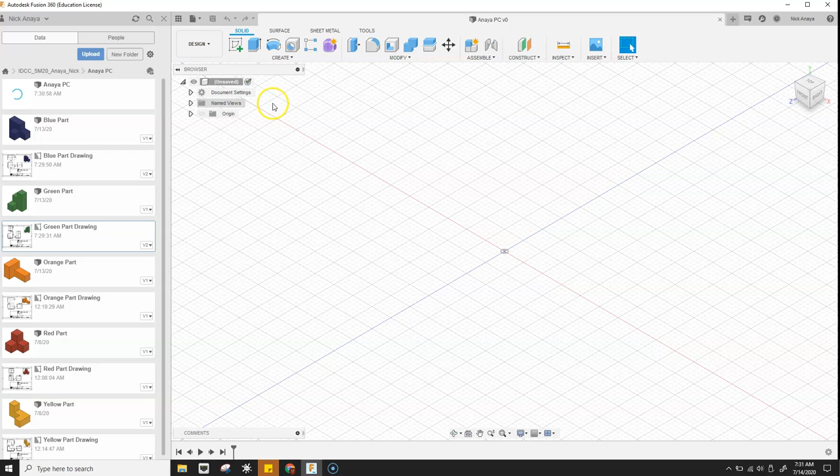So in order to do that, we have to first title this untitled document, give it a name so that it's saved. So I'm going to click save, and then I'm going to go ahead and call this Anaya PC. So that's going to create the file that is going to end up being the assembly of everything.

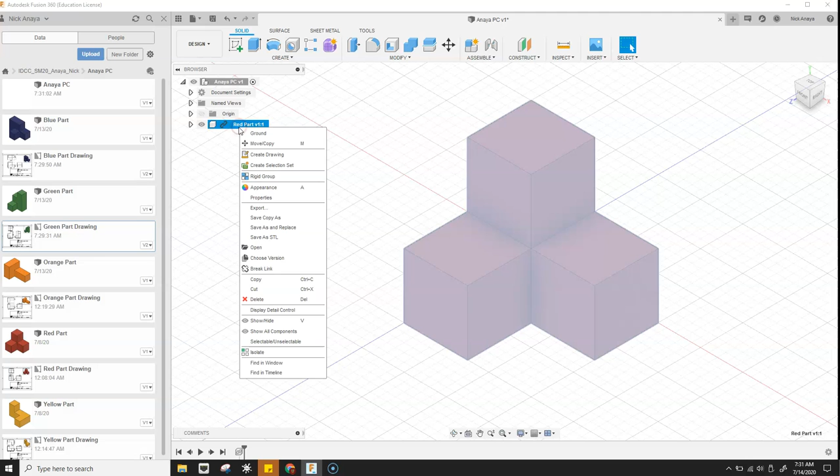So I'm going to first take the red part and pull that in. And that's going to automatically put it here. Now, first off, we'll just click OK, and that way it's at the origin, but it can be moved. We don't want to move it. We want to leave it at the origin initially. So I'm going to go ahead and hit revert so it goes back. Then if I right click on the item in the browser, I can select ground, and now this is locked in place.

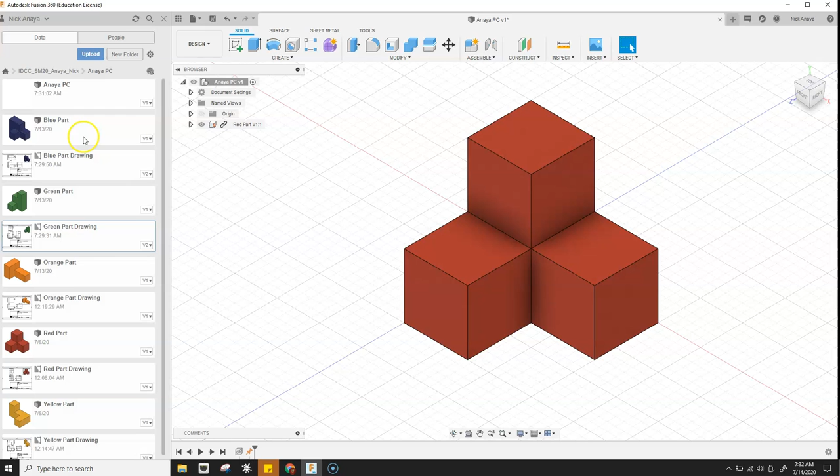So in Fusion, everything is connected with a joint. It's a little different than some other CAD programs where you might be used to constraints and you constrain different faces and you add 3 constraints per connection. In this case with Fusion, most of them can be done with one instance of the joint. So in this case, let's go ahead and let's grab the blue part, pull that in.

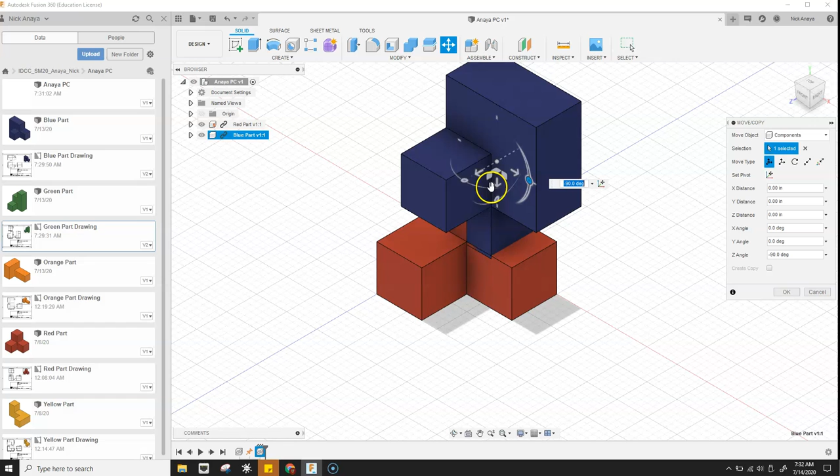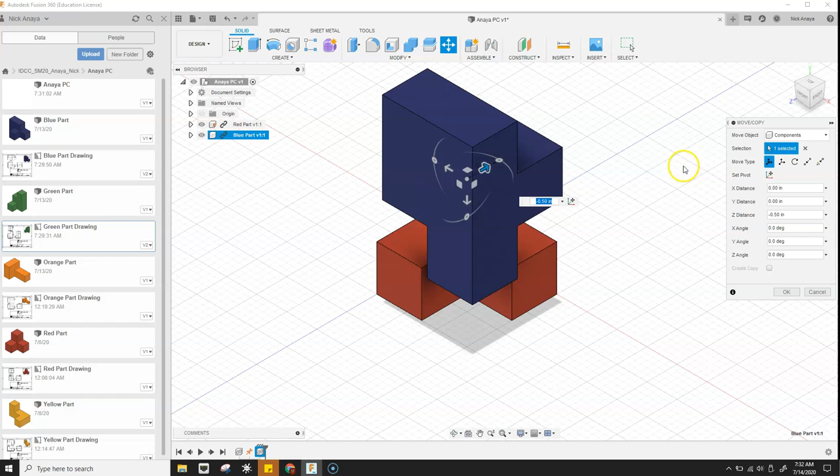You'll notice it goes to the same origin area, but then I'm going to go ahead and use the arrows to drag it and manipulate it so that it is in the orientation that I want for actually interfacing with the red block. And each time, as I spin it, I'll look at the degrees, that can help me kind of figure out where to put it. And then now it's facing the right way for how I want to connect it to the block. And then I'll click OK.

So now for the joint, I'm going to go ahead and click assemble and then choose joint. The other option is to pick J. And in this case, we're going to join using a rigid joint. So if we look under motion right here, this is rigid, it's selected. There are a bunch of other types of joints, but for the puzzle cube, it's not moving at all, so we're going to use the rigid joint for everything.

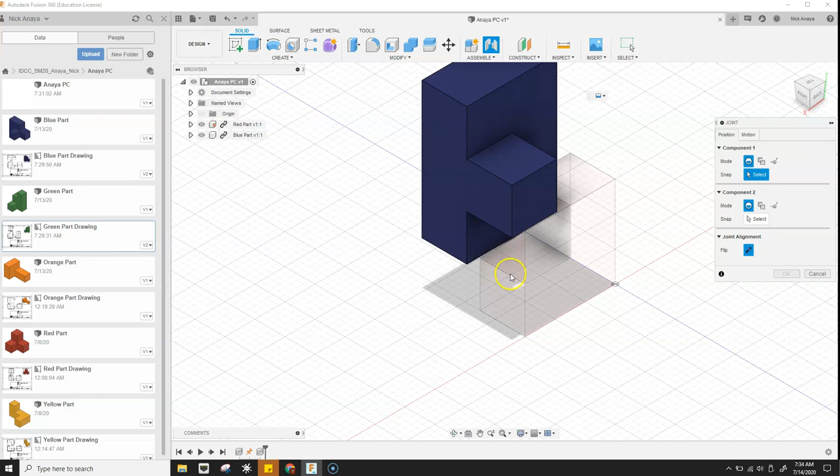So the first thing we're going to want to do is make a joint between the blue block and the red block. So I'm going to want the bottom of this to interface with the top of the red block. So the very first thing I'm going to do is click on select so that I can begin selecting a joint position to match up with the red block. So in this case, I'm going to spin underneath and grab the center of this portion of the block. So it gets that little circle. I'm going to click on that.

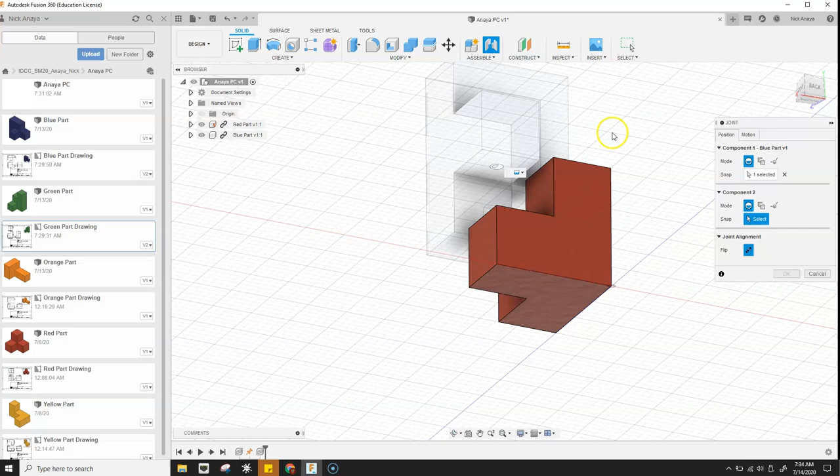Then it's going to let me pick my second object. In this case, I want it to be the center of the top of the red block. And I will click there. It's going to put the two together. And then I'm going to click OK. Now, if I try to move the blue block, it will no longer move. And then I can also see that there's a rigid joint icon right there.

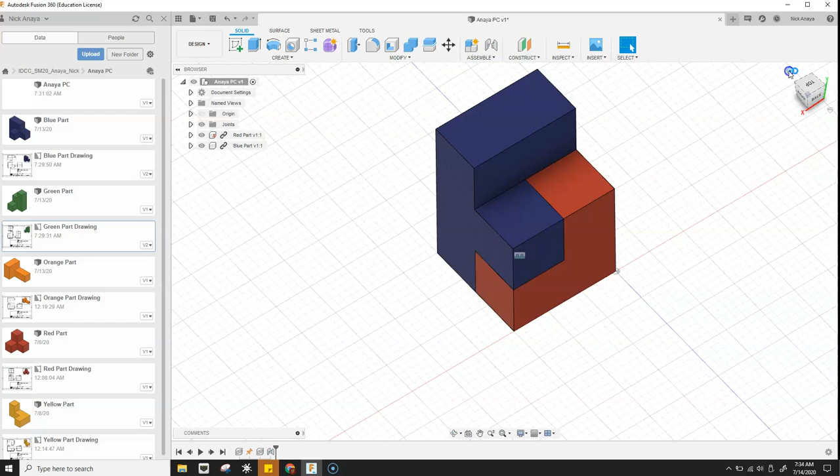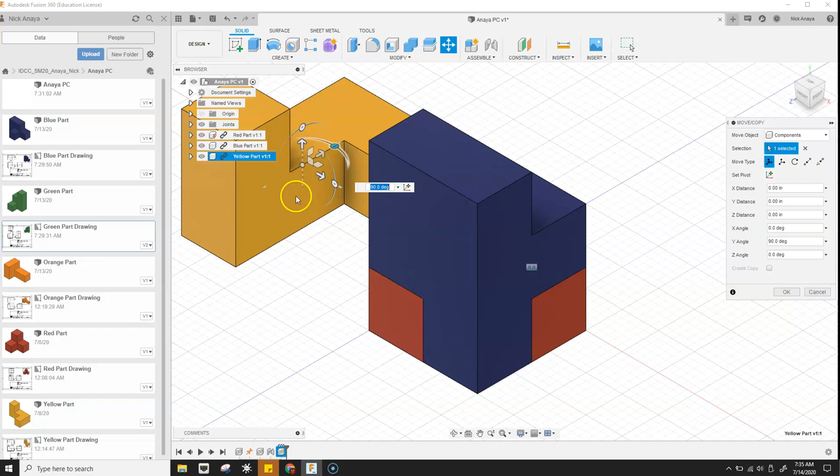So if I go back to my home position, the next block I'm going to do is going to be the yellow block. I'll pull that in. The yellow block needs to go back and to the left. So I'm going to first push that backwards. Then I'm going to spin it perpendicular, and then, just to make it align a little better, move that over, and I'll actually bring it in a little closer to where I'm going to place it. And then click OK.

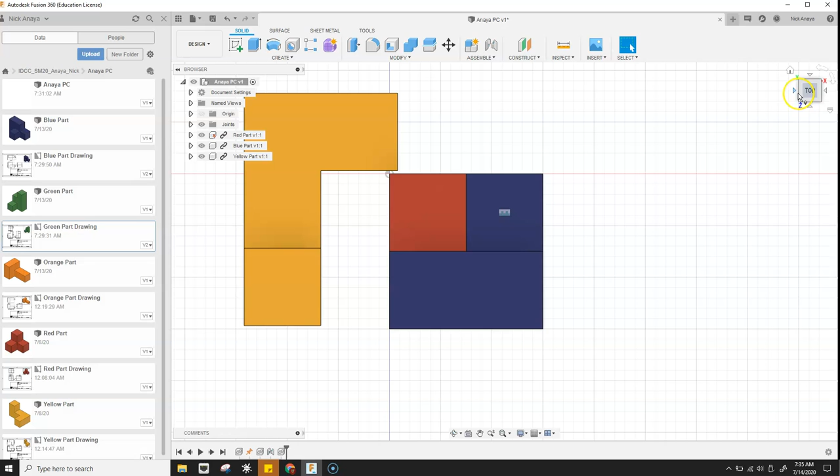So now, if I go to the home position again, I have this yellow piece that I want to have mate with the red piece or the blue piece, depending on where it's going to touch. So in this case, probably the simplest way is to match up the corners on the underside. So if I look down here, I'm going to want this corner right here to match with this corner here. And so that's what I'll go ahead and use for my joint.

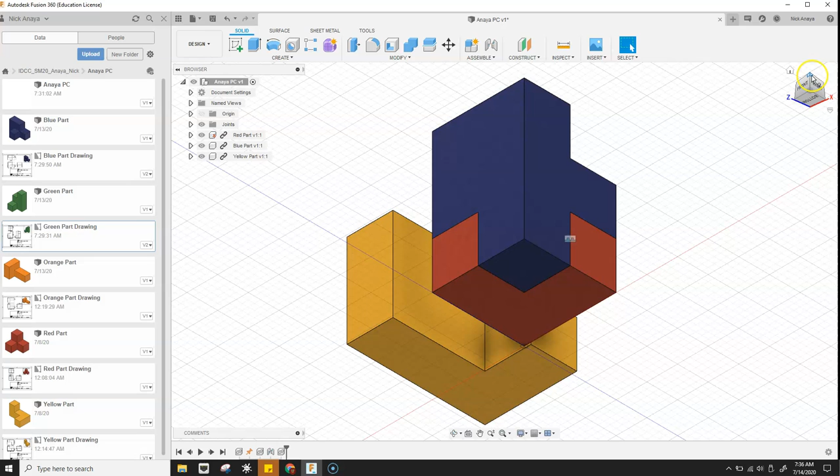It's also possible to use the various faces. It just really depends on where you can get a proper joint that will match, or I guess we could also use this bottom left-hand corner. Actually, let's go ahead and do that because we can see it better. So I'll flip around to here. We're going to go ahead and hit J this time for our quick command. And as you can see, as I move towards the corner, if I start on this face, it will jump to the corner and have the joint point in the lower left-hand corner facing towards the puzzle cube.

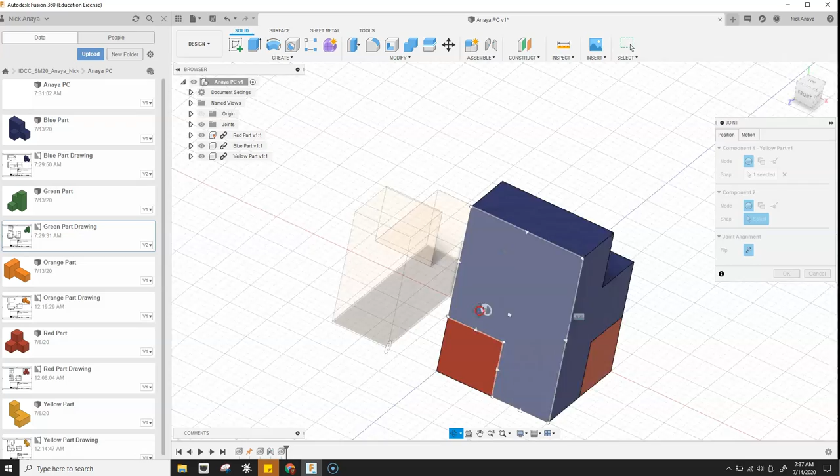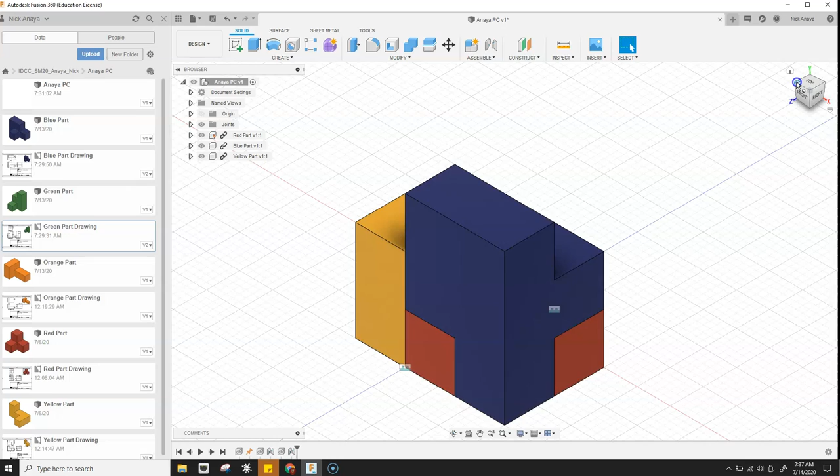So I'm going to click on that. Then I'm going to orbit around. In this case, I hold Shift and push on the trackball. Go to the red one, go to the corner, and click. And that's going to join those. Click OK. Home position. If I try to grab this and move it, it doesn't move, so we're locked. There we go. We've got that connected, and we're going to go ahead and get our green piece now.

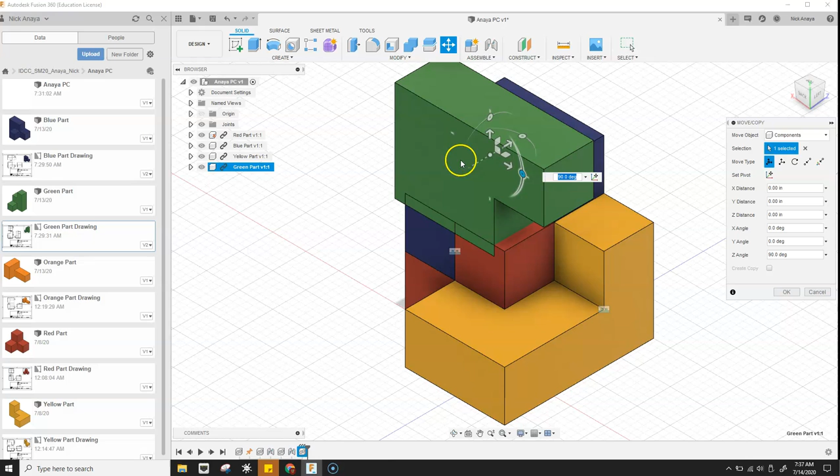The green piece comes in. It always comes into the origin or wherever it was built in its own drawing, but then we can move it around to figure out where to put it. So I'm going to orient it so that it matches the orientation that I want with the puzzle cube. And then move it to a position similar to where it will mate with the yellow piece. So I'll go ahead and click OK.

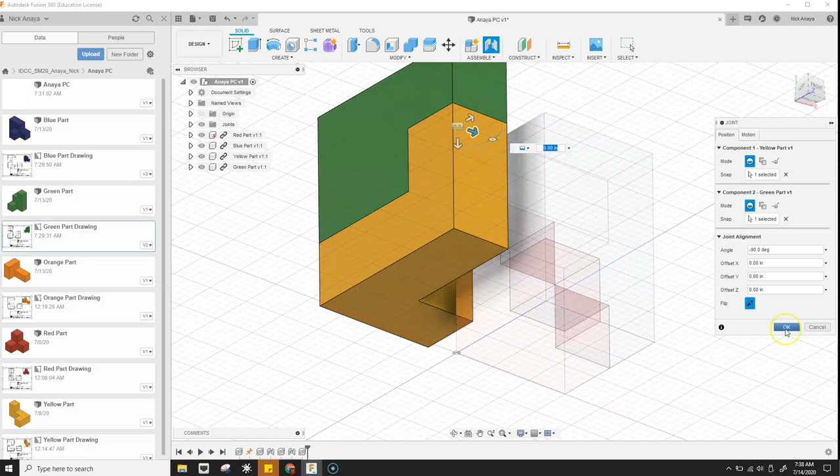Now hit J for joint. And now I'll spin around. I'm going to go ahead and join the top of this yellow piece to the bottom of the green. And it's interesting because the yellow piece flies up, but then when we say OK, it actually pulls the green piece down. So because the yellow piece was already locked, it will move the green piece to it. But in the animation, it always moves the first piece you click towards the second piece. I'm not sure why, but that's what it ends up looking like.

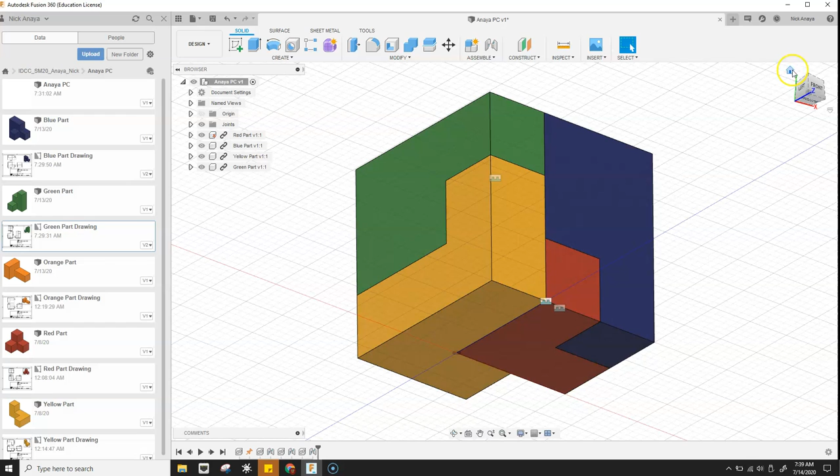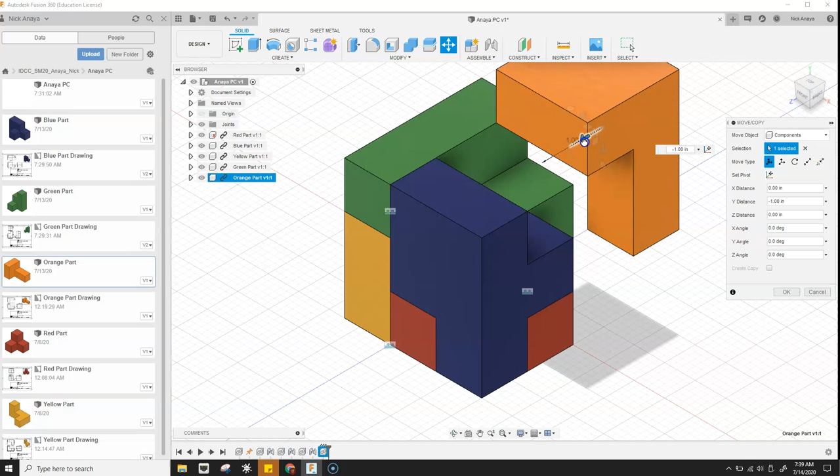So now we have the last portion. We're going to grab our orange part. We're going to drag that in. Then we want to rotate it. Position it so that it is close to matching and click OK. So now it's in the orientation we want, and we'll hit J. We're going to go ahead and we're going to mate this face to the top. We'll mate it to the top blue.

But what we can see here is that there is no middle point to the blue face that matches the middle point of the top orange piece. So there's no joint center here. So it actually doesn't make sense to try to mate the center of the orange block to that position, because that face is actually an L shape, and so it doesn't quite work like that. In this case, then what I'll probably do is I can click the X here to undo that joint assignment initially. So that gets rid of it.

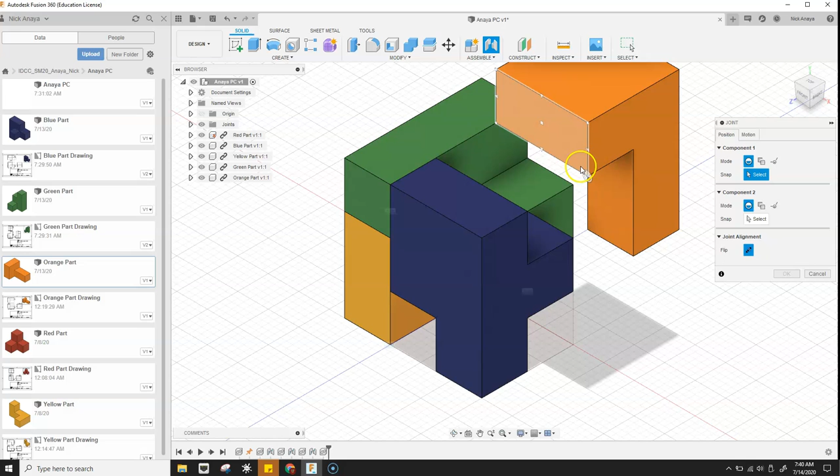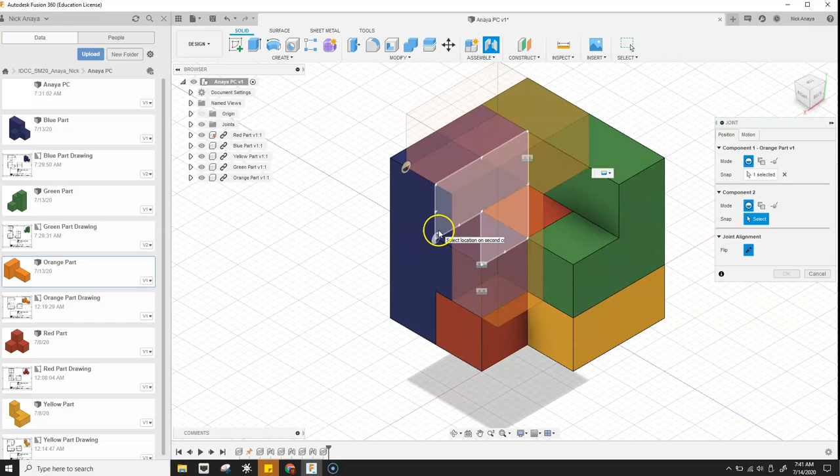Now I'm going to spin around to the other side. And instead, when I go to join, instead of doing the center point, I'm going to do the lower right-hand corner. Now, one other note, as we do a corner, you can actually have it line up with the different axes. So whenever you're going to do it, you always want to start on the face or the plane that you want the joint to face towards, and then move it down to the corner and click. And then I'll spin around, and we're going to start here, move to that corner, and click. Now those two line up.

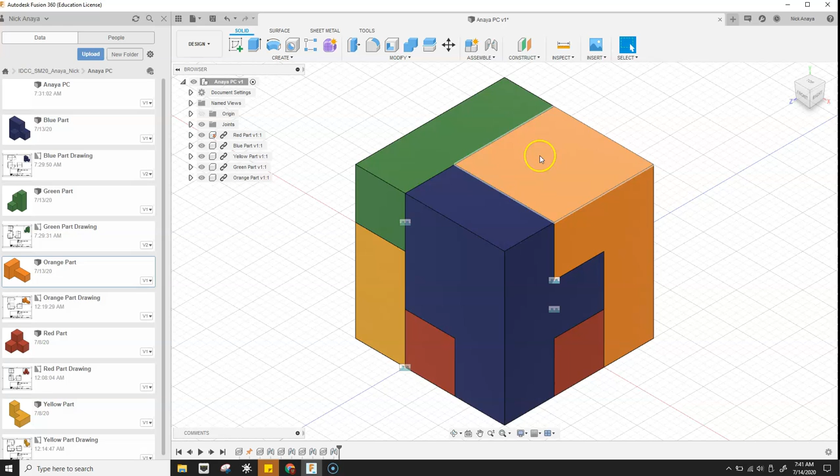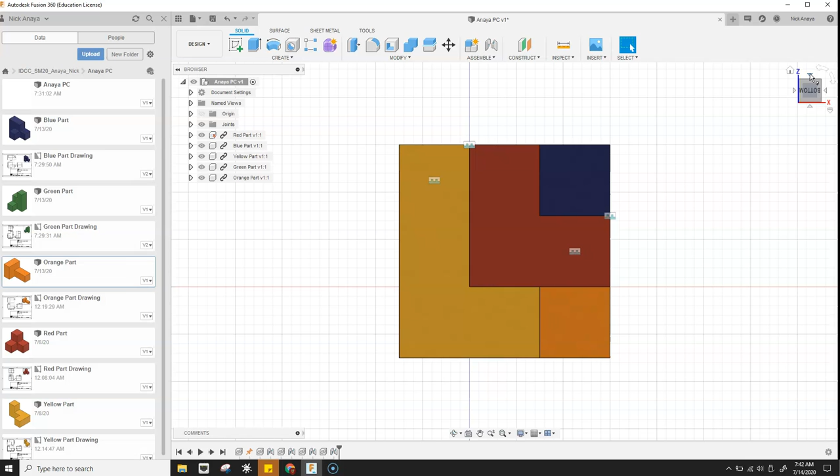Click OK. And we've now done 4 joints to add 4 of the pieces and 1 ground. And the cube is all locked in place. Go back to our home position, and it kind of looks sometimes like it's augmenting the lines where there are joints or where there are connections between the parts. But if we go ahead and look at a profile, you can see that it's perfectly flat all the way around, and that maintains as we spin the cube. And also maintains if we rotate vertically. All right, that's the assembly.